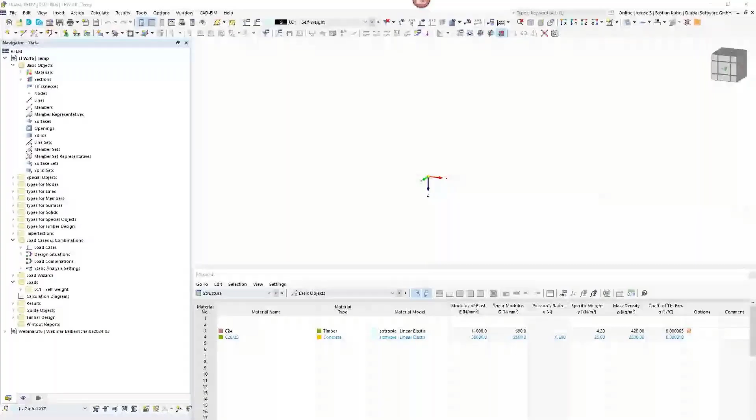Okay, I will share my screen for you. Just have to get the right one. This one's the right screen. Oh, I have to click share. Sorry. Yeah, looks quite good.

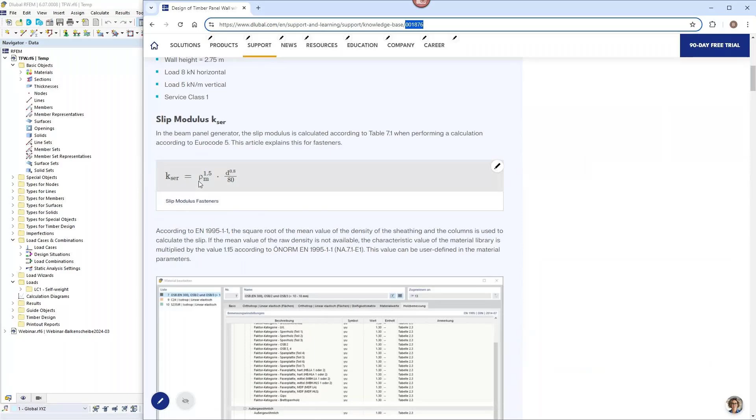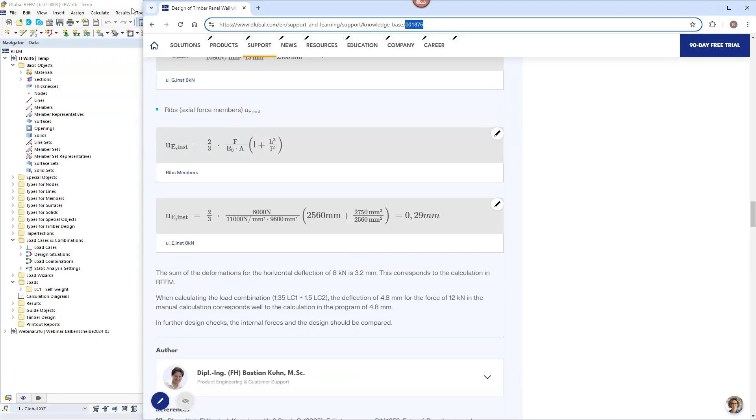Okay, before I start the modeling of this timber frame wall, just as an information for you, my colleague will probably share the link with you. The model I'm doing here has been analyzed and calculated also by hand in our knowledge base. You can find it by the number 001876. And here you can see the formulas that are lying behind it, and also the deformation. And of course, the inner forces are calculated here with hand formulas or equations. Maybe once I've generated the model, I will take a look back to the homepage just to show you what we are doing here.

Okay, before we create the model, we have to give a model name, timber frame wall. I will choose type of model 3D here. Then in RFEM 6, one of the advantages compared to RFEM 5 is that you have every design add-on completely integrated into the software, and it's not a separate add-on anymore. It's completely integrated into the software, which has a lot of advantages for speed and also design purposes. And so I can decide what I want to build or plan in here, and what we want to do in this first simple structure. I mentioned it already, we will create a beam panel.

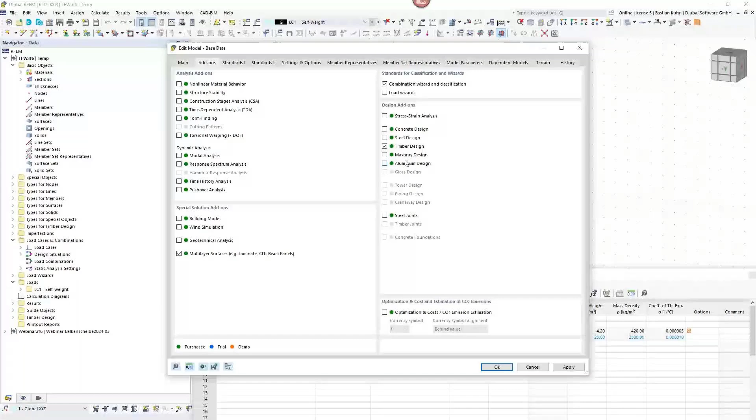Therefore, we would need the multi-layer surfaces add-on. We don't need the load wizard. We even don't really need the combination wizard, but it does not matter. And we will do the timber design in the timber design add-on. Looking at the third register in the basic data, we will have the standards here. We are calculating according to the timber Eurocode, and of course it is also possible to calculate according to the American standard, Canadian, and a whole bunch of others, even Chinese is possible for timber design.

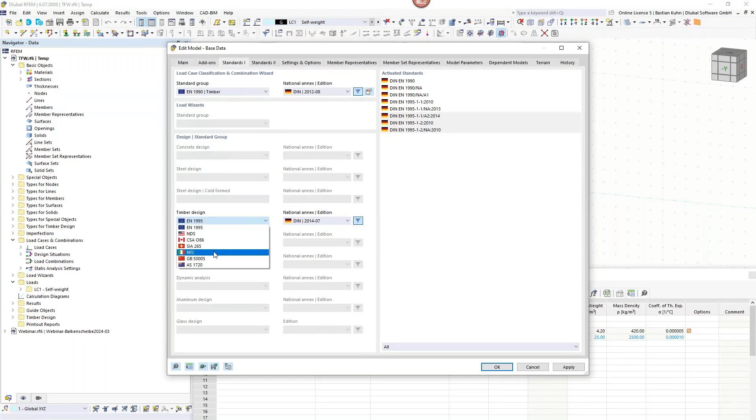We will choose timber design with all the national annexes that are available for Europe, and there it is quite similar. What is possible: America, Canada, Switzerland, Italy, because it has some special rules in Italy related to Eurocode, but different a little bit. There's Chinese and there are Australian standards as well. Okay, all the other options are not relevant for this quite simple model.

Okay, we start and we will create the surface or the wall, and therefore we create a new thickness. For starting, similar as, I don't know if you ever worked with our software, but also when you created a CLT wall or floor, cross-laminated timber, you can start with just a concrete material.

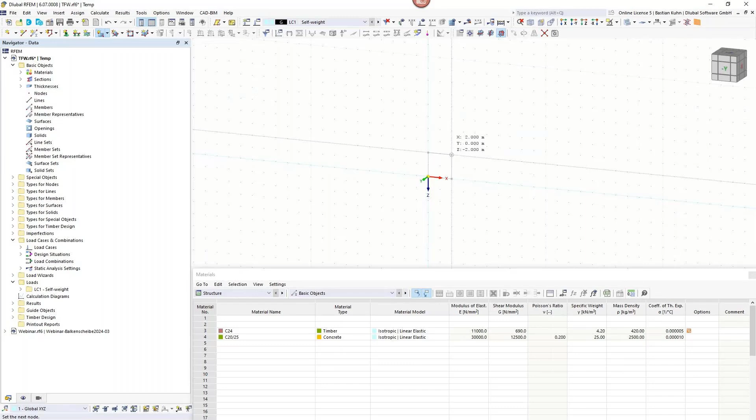That's what I'm doing here. Any kind of thickness, that does not really matter. Just create it for drawing the structure and how it's going to look. So it has a size in X direction of minus 2.56 meters. This is now a theoretical example, and I chose this distance of 2.56 meters.

I can maybe also add a little dimension line just so that you see it here, maybe in the other area here. Of course, for timber frame walls, you have a standard distance of each beam in the panel of 0.625 meters, so 62.5 centimeters, which is the standard design.

In America, with the inches, it's a little bit different, but once again, we're doing this here according to Eurocode. I will show how to change it also for the relevant parts of the American standard, but the main purpose here is Eurocode. And just to get back to the homepage again, here the hand calculations are also based on the Eurocode.

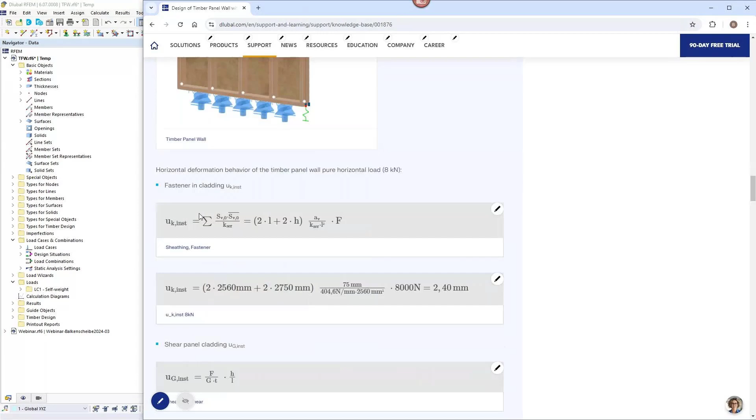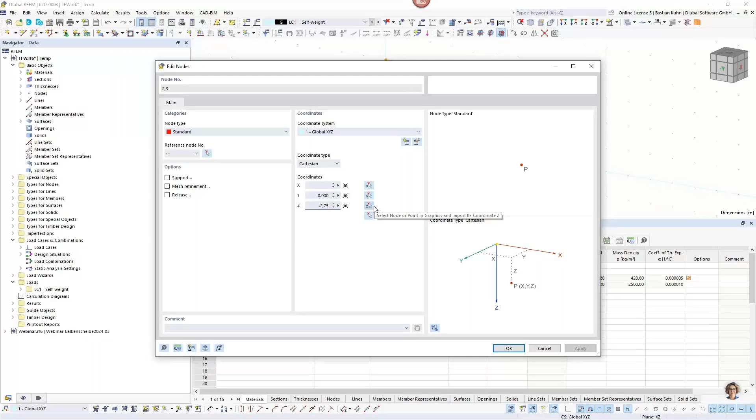Okay, and to see it in this picture, moving a little bit, because of the distance here I get exactly 5 beams side by side in this structure. Okay, just as an explanation if you ask why I chose such a distance here. For the height, I want a more European standard value of minus 2.75.

Then I will add supports, and the first support should be not movable in X, Y, and Z direction, and also no turning, because it's in this case a 2D position, and I will put that at the origin in order to keep it statically determined. I will also just move one support to the right side. In the bigger model that I'm going to do just after this simple model, of course, you would do a complete support underneath the wall. That's for sure. It's just for this first example here.

So this one is moving, okay, here, and so that it's not flipping outside of the plane in Y direction, I will define the translational degree of freedom in UY direction.

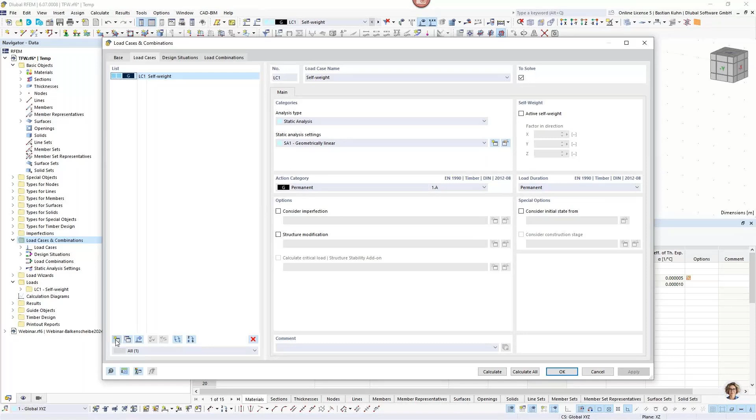Okay, I will put a line load for the first load case with a value of 5 kilonewtons per meter, and go to load cases and combinations and create a new load case for the wind. I deactivated the self weight so that it can be compared to the calculation by hand. And here's the wind, and I'm directly assigning a load combination in here manually.

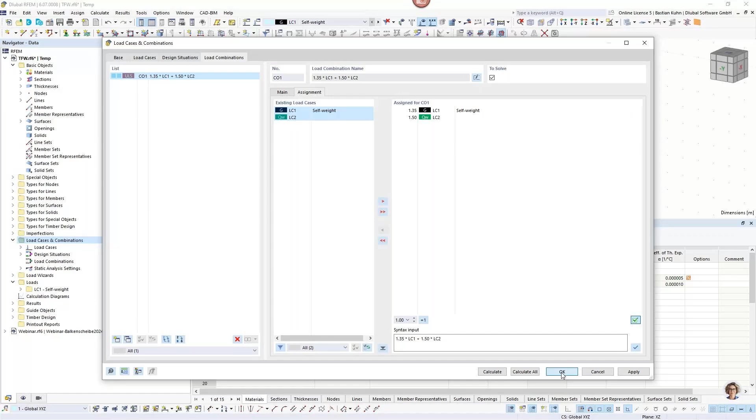That's what I mentioned at the start, that I don't even need the load combination wizard here, as I'm just typing it for this simple model. Once again, in the bigger example right after this, we have used the combination wizard. Okay, just typed, all right, and then it's there. So this is the combination that we are designing.

But of course, I forgot to define the horizontal load from the wind. This is going to be a force with a value of 8 kilonewtons, and it goes in x direction, minus of course, because I want it to be moving this way. Okay, but so far this is still a concrete wall, which we don't need. And how are we going to change it to a timber frame wall?

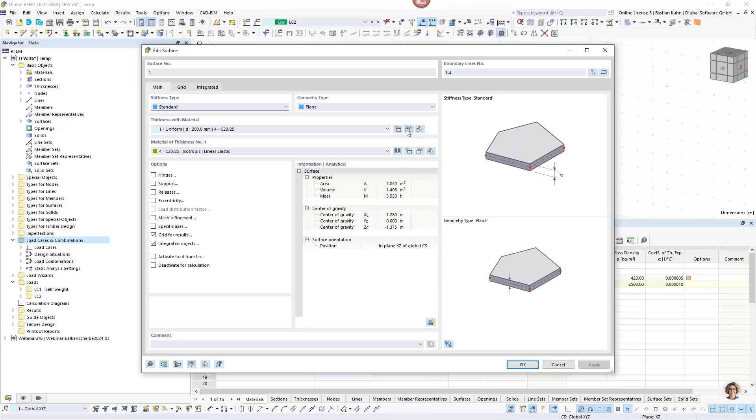We double click on the surface, and we'll edit or create a new thickness. In this case, I'm choosing edit this thickness. And now that I've activated the multi-layer add-on, I can choose the layers here. If I wanted it as a CLT wall, then I would have done it this way. But in this case, we want a shear panel. So that's the thickness type for timber frame walls. Not even pure timber frame walls.

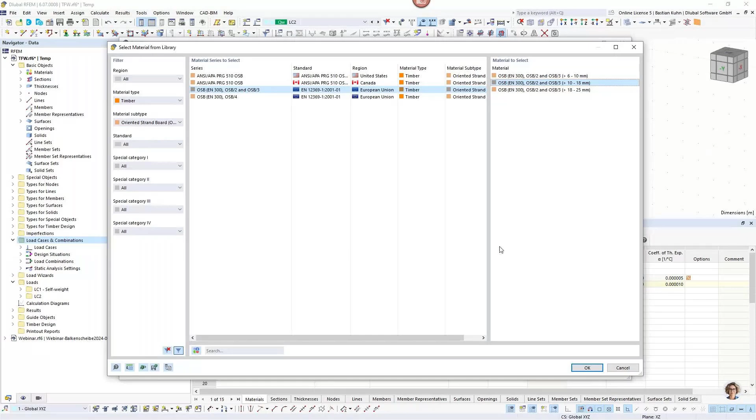You will realize it when I'm in the material database via this library book here. So now it's predefined OSB according to either American, Canadian, or European standard. For our example, we would use 10 to 18 millimeters OSB. But if you use the drop down button here, you can also use gypsum, for example.

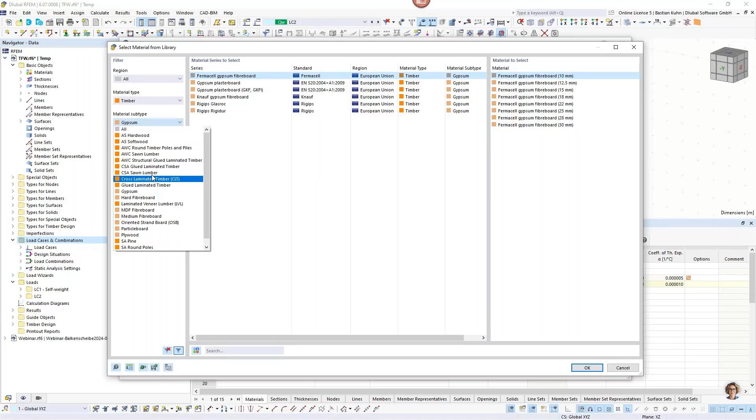Yeah, even for timber floors, at least here in Germany, what's used quite often are Fermacell gypsum fiberboards in order to stiffen your structure. So that's quite an economic way of creating your walls. So, yeah, I mentioned it here.

I would choose OSB. I can also show you just as an imagination how you would do it with the American standard. It works quite simple, similar to what you choose. I just have not switched my dimensions to inch. So for me, it's rather hard recalculating the 0.5 inch because thickness needs to be defined here additionally. So this is what we will probably better be choosing by the European standard.

We have to change the material into orthotropic for this type of thickness, and I will define 15 millimeter thickness in here. All right, so that's the sheeting. I also can make the planking from both sides. I can vary it, so it can also be unsymmetric. I can even say the sheeting on the other side is made from a different material than OSB.

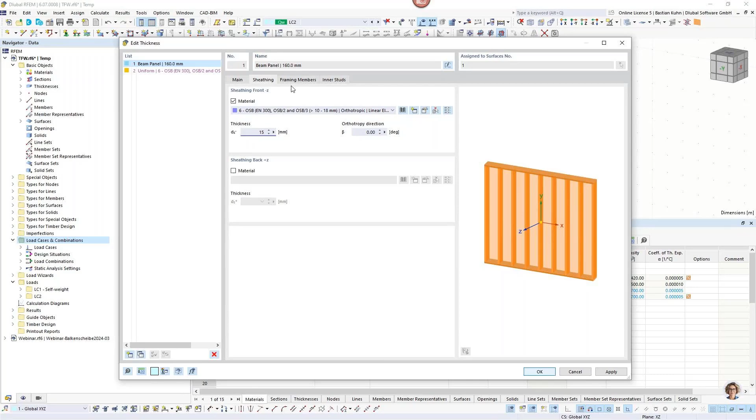For example, if you are using some insulation material, and this has also some capacities for stiffening out your structure. So this would also be possible to be defined. So the material can be different on front and back of your beam panel. Okay, so this leads us to the framing members. Here that's the usual material section database that you can choose.

Sensible, of course, is here only the rectangular one, but just as a notice, it is possible to choose and define any kind of section here. It's just for this case, I'm using a 6 centimeter by 16 centimeter board or beam inside, and this is the most standard way to do it, and that's what I'm going to do for this example. These special selections I will show in the bigger 3D model afterwards.

Then you choose the connection type. You can have nails, staples, or user-defined slip in here. And when we choose staples, for example, with the dimensions of 1.5 by 50 millimeters, you see that the stiffness is already calculated in here. We're choosing a spacing of 75 millimeters.

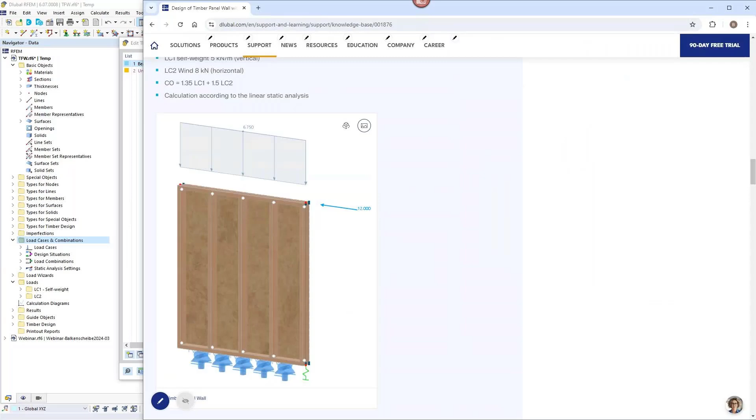And when we compare it, I hope it's the last time I'm switching to the homepage. If you look into this here, you see how these values are calculated in here. So with the slip modulus from the mean value of the beams and the planking. Okay, so this gives this value.

It would also be possible to consider the connector stiffness just in one direction. So then you have it just in X direction and the Y direction will be 0. I will also show what that means in the generated beam panel. So that's an important info that you should remember once we generated the beam panel. So the point what I'm showing you here is this is a generator to generate the timber frame wall in the big program RFEM.

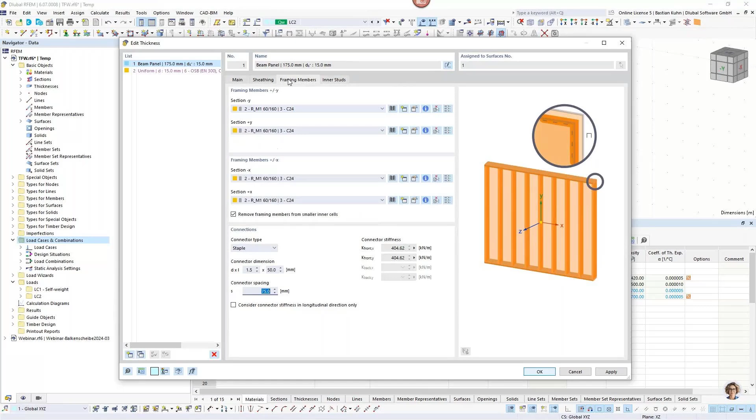Okay, then we have the inner studs in here. You can have other sections in here. That's similar to what I showed you when I was working in the framing members. It counts here vice versa. You can have here IPE profiles if you want. For example, if you have a very high vertical load and you say, okay, in one special part of it, I want an IPE, then you can create any distance in here, 1000 millimeters, for example, and create an IPE. So that would be possible to also be defined.

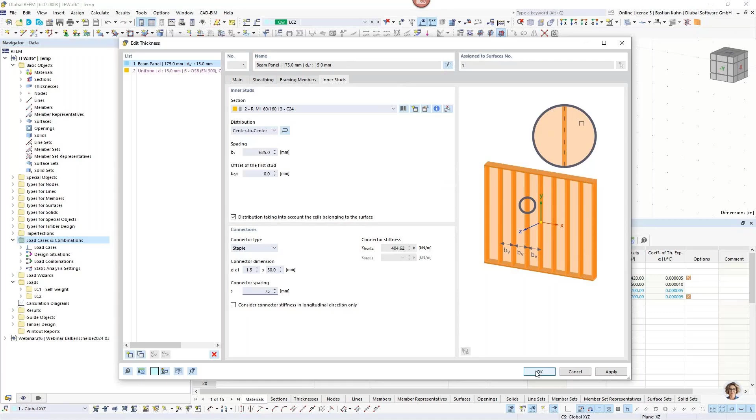All right. But here, for this example, we are choosing center to center and the spacing that I already mentioned, 625. This offset and what it makes, I will also show in the bigger model afterwards. Okay, but what I'm choosing similar to the definition before is 1.5 and 50 in here and the connector spacing of 75 millimeters. So then I press OK. And one more time, OK.

So nothing's changed. Surprise. Why is nothing changing so far? The answer is because I have not shown the beam panel. Our idea for developing the beam panel is that you work, as you know it, with surfaces. And then inside it, you generate the beam panel.

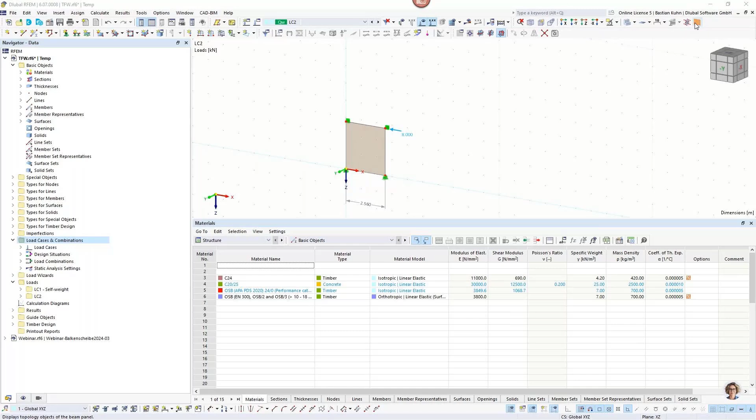And when you now activate the beam panel, you can see that it's generated in here. So here is the top beam and the bottom beam, and also the posts. So we have 5 posts in here, obvious because of our distance. I maybe can switch on photorealistic visibility a little bit just to give you a better imagination of what it's doing.

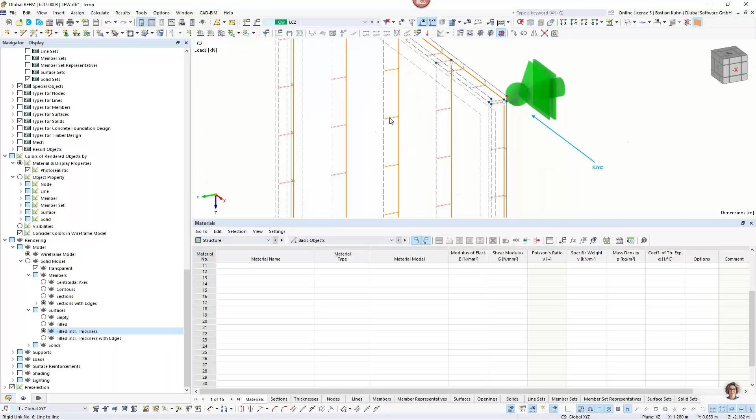I hope that can be seen this way. So you see the OSB is eccentric, moved to the outside. It is connected with these little, now I'm switching the rendering off. It is connected with these little pins in here, which are representing the staples that we have in there. And when we double click on one of those pins, you can see that there's a rigid link defined and it contains the stiffness that we generated in the beam panel.

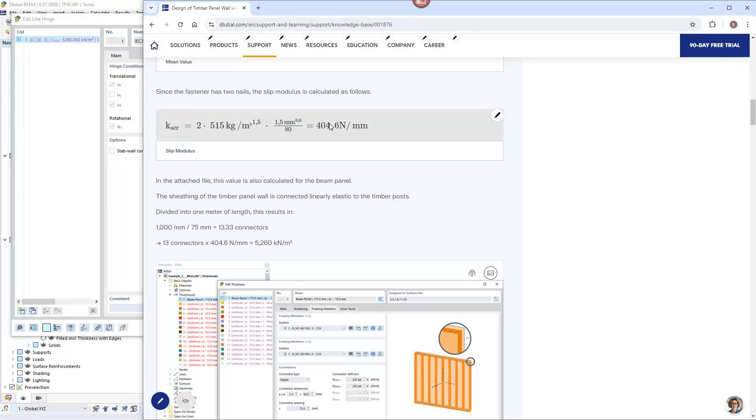I promise not to show the homepage anymore, but I do it just one more time because it's just good to have it seen in here. If you remember, I had defined a spacing of 75 millimeters, and this is calculated on 1 meter, which gives you 13 connectors. 13 connectors times the calculated slip modulus gives us this value in here. So, and this is done here. And I also told you that we should remember this longitudinal stiffness, where if I had chosen just to have the stiffness in UX direction, my UZ value would be 0 in here. So that would also be possible.

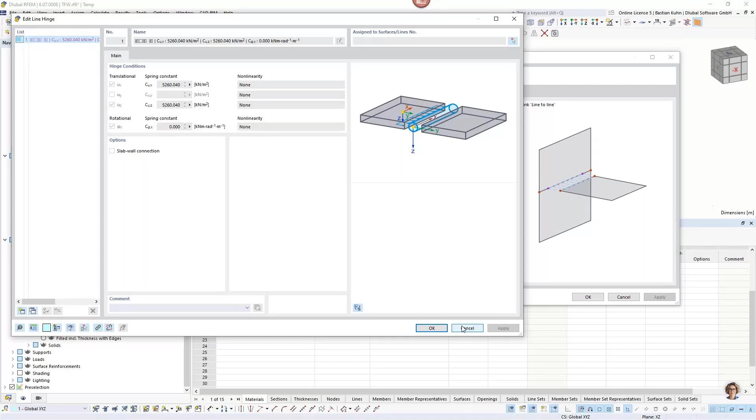Okay, this is the generated hinge there, and it's generated once again between each beam and the OSB planking. I will put on the rendering again. Oops. So here this way, it's probably a better visibility. Okay. So now we want to see results of it, of course.

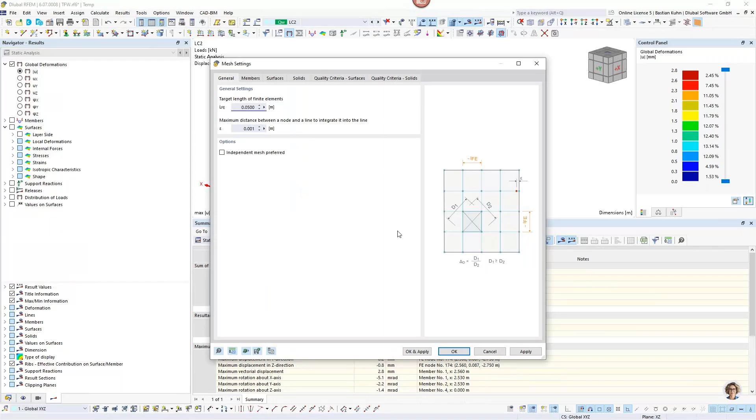I did not mention the FE mesh. That is something that we should have maybe looked at before, but we can calculate it once again. I will get the rendering off, and you see that the FE mesh in this case is nonsense. So we have to go back to the FE mesh, make it a little bit finer with 5 centimeters, which is maybe too fine, but for this example, I think we can do it just to compare our deformations and inner forces. And maybe also the reaction forces, because actio should be reactio. That's what I learned in my studies. All right.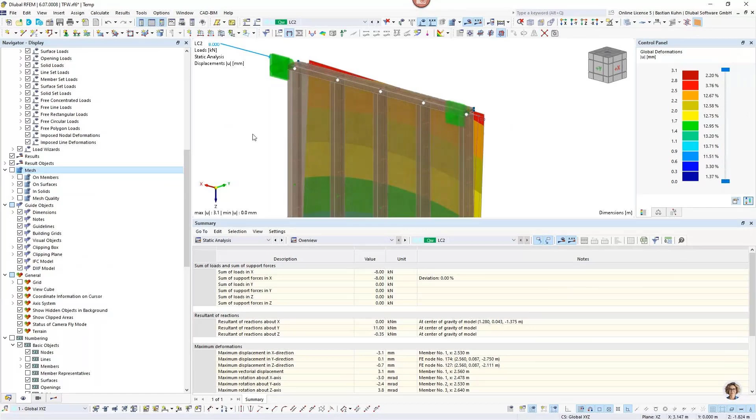So you see that the FE mesh is now fine. Maybe too fine, but it's good. We will leave it this way. And we have a deformation of 3.1 millimeter, and reaction forces, actio, reactio, that works. We have, because of the eccentricity, small forces here, but I think they can be ignored in this case, which gives us a little bit changing inner forces, but not that much. This is the deformation that you would also calculate by hand with this simple formula. And now it's actually done. You have the stiffness correctly assigned, so that's all working.

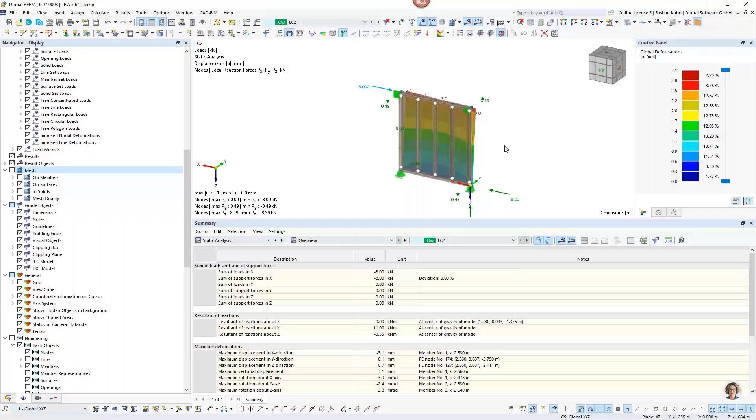Of course, we did not design the timber frame wall. So how would you design the timber frame wall? This I can also show you via our new, well, it's not new, but in RFEM 6 it's new, the so-called member representative. So if I'm choosing here member representative for the posts, and what do you verify for the post? The buckling, of course. And the advantage of the member representative, in case you have not worked with this in RFEM 6, is in former times you would have to choose all the posts and edit them and work on them. And this is now not necessary, because every member that is similar to the other one, which is the case for posts in timber frame walls, is summarized in the member representative. So you just do it once, and in former times you did it several times. This is one of the good advantages.

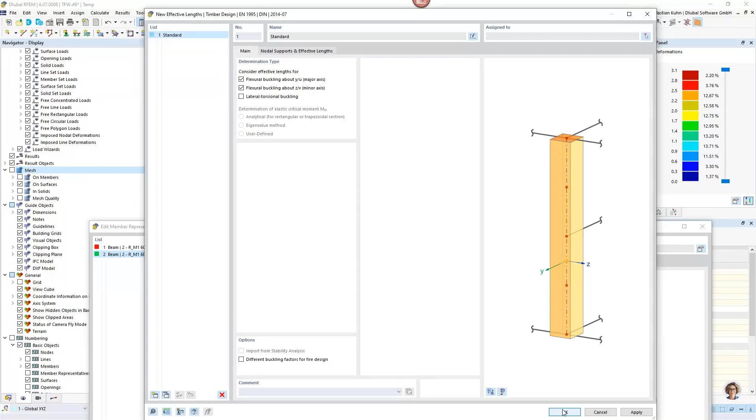And then, of course, effective lengths, where we do not verify lateral torsional buckling. We even do not need to verify the buckling about the minor axis, because that is covered by the planking or by the sheeting. But just for the sake of completeness, we are verifying it. Then we switch to the add-on timber design, which is right here in the drop-down menu. Once again, one of the new advantages of RFEM 6 is that you do not have these add-ons here on the left side anymore. I mean, you have here the register timber design, but it's completely integrated into RFEM 6. Okay, what do we verify?

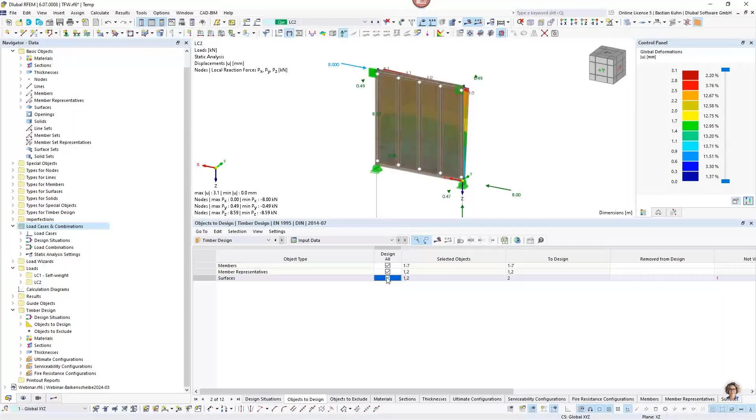We want to verify this member representative that I just showed you. So that's member representative 2. And then we calculate it and look for the results. As I said, what we want to verify here is buckling. Pressure against lateral to the grain for the downstand beam is also possible, but it requires the definition of an additional beam. That's why I'm skipping this here, just as information in case you ask yourself this question right now.

Okay, you see stability even works in both directions, and to show you also that the verifications are done, and we are very proud of how these verifications are shown now. Here you see that all the equations are there with nicely written formulas, and of course you get the slenderness ratio and the buckling factors, and this can directly be put into the printout report and is your documentation of the results of what you have calculated here for the posts.

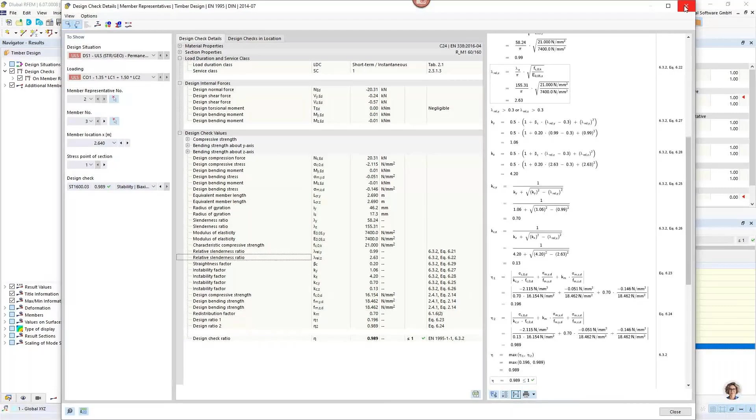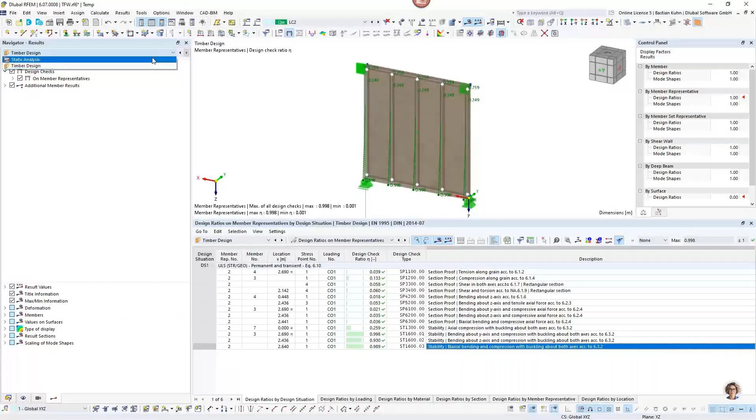Okay, the connections inside are also the most important verification. It must be done by hand, but there are methods and ways that help you calculate that. You can take a look into Navigator, results, static analysis, releases, and then line hinges and forces. So usually the value that you need, we'll switch off this one and also the rendering once again.

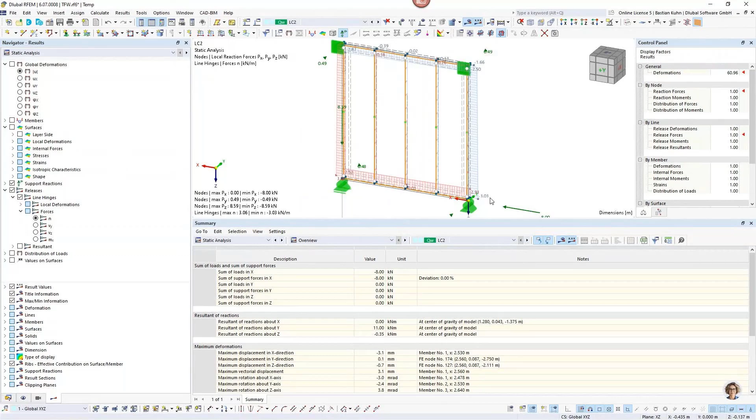So you see here, in the middle nearly nothing is happening, and it's rather a constant value. So when you are very much on the safe side, you would calculate your load bearing capacity of your staples in this case, and compare it with a value of 3 kilonewton per meter, or you could also take the middle value. This is what the software gives you, and we're also working on designing them. Of course, this will also be possible quite soon.

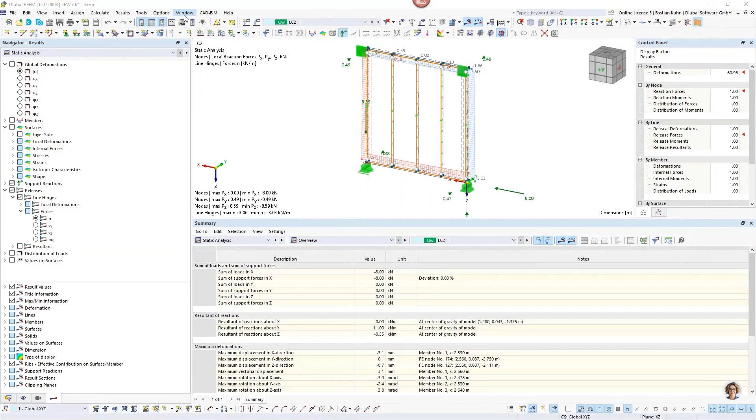Okay, this is the simple model. In case there are no questions unanswered, there is a question: what about the possibility to add openings? Yes, that's what I'm showing you now in the bigger model. So that's a good question and leads us to the bigger model. Therefore, I'm closing this and switching to the bigger model.

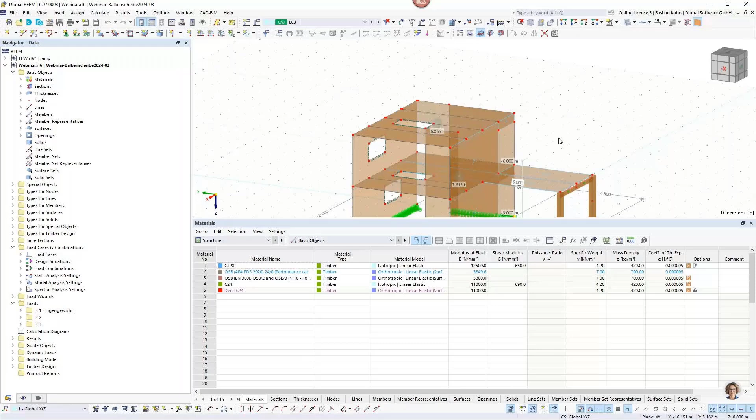It is a house that I have probably been showing here for 10 years or something like that. So if you take a look at the historic structures, this is something I probably showed 10, 15 times here already. It is completely made from CLT. Here it has a little balcony. It has a length of 8 meters, width of 10.8 if you include the balcony outside.

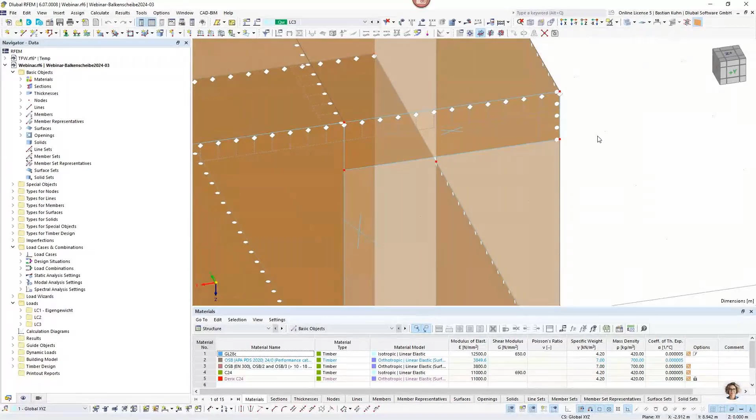All the CLT plates are connected with hinges here, and also here on the wall they are also connected. Not the surface, I wanted to take a look at the line hinge. Here's one. Okay, so there should actually also be a slip in X direction, and it's similar to what I showed you in the smaller model before. Then you get the forces in the line hinge and have to compare them with the load bearing capacity.

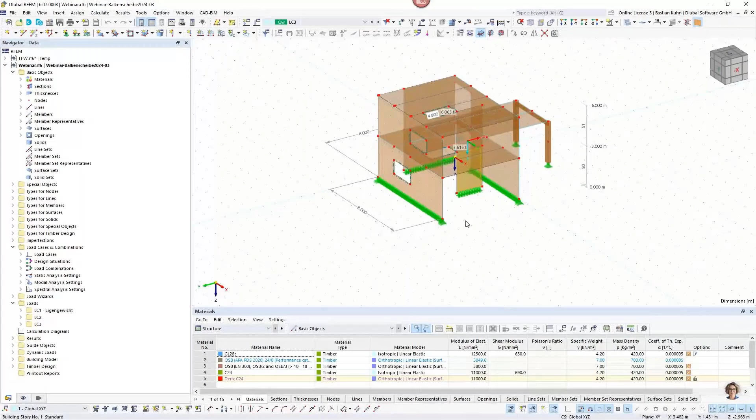Okay, so now this CLT building has openings here, of course, and I want to change maybe this wall and also these inner walls into a timber frame wall. Before I do this, what you would have to do in order to regard the opening is to separate this surface into several surface cells. And for this, we have a new function here. It's called extend trim line to next member line.

So we say okay, and then you see that it's divided here, and I now have these surface cells. Surface cells are quite a new object in our software, which are useful on a whole bunch of elements in the software. And we are now also using it for the beam panel.

You probably know that, at least when working according to Eurocode, for the timber frame walls there is a simplified approach according to chapter 9.2.4.2 or something like that. I'm not 100% sure which chapter it is, but it's 9.2.4 something. And this is for a hand calculation.

And what would you do when you calculate such a structure by hand? You would calculate your horizontal force, and then you would say, okay, this surface cell will bear this horizontal force, and this surface cell will bear this, and I need anchors here and here at this point, and I'm totally skipping the elements in here.

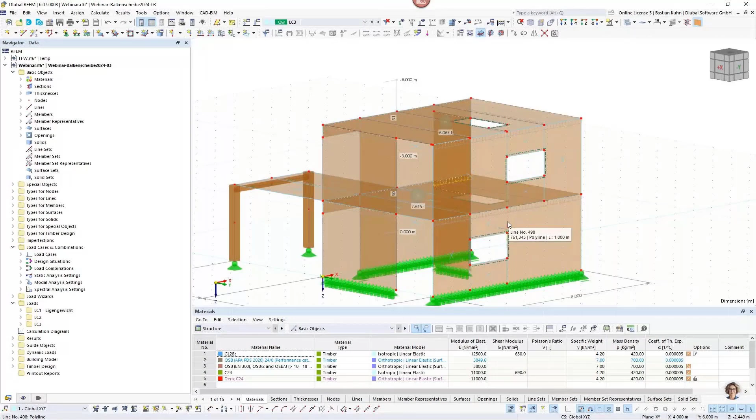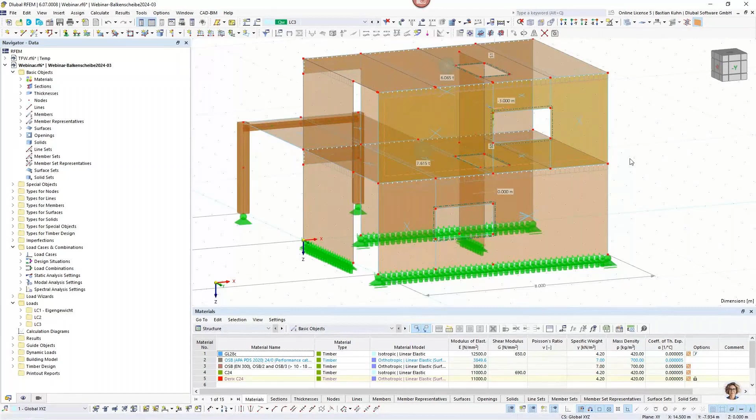Maybe I would delete this one and divide the bottom surface at one point, just to show what you can do regarding slip and what you cannot do, and where the difference is compared to the top, where I still have one continuous surface. So I right click and say divide surface with intersecting lines, and now it's divided. I'm just doing it on one side for demonstration purposes.

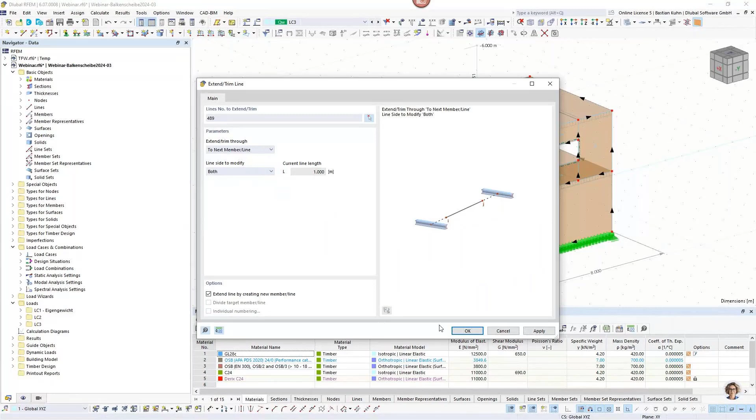So extend via copying, leaving the cells here. I'm quite curious what's coming out of this, because I've never tested it before.

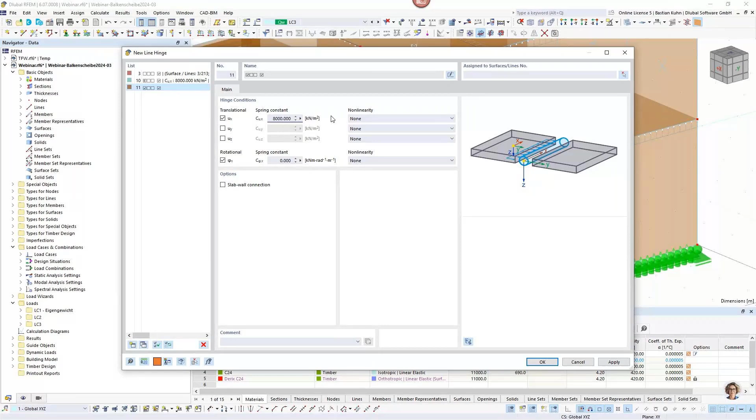I will insert an object line hinge dialog box, giving it my favorite slip of 8,000 kilonewton per square meter. Here and here... and here I'm having the slip. That's quite similar to what I've done on the walls, on the CLT walls.

Sorry, I forgot to mention the load. We have self weight here, quite simple, 1 kilonewton per square meter over the complete balcony. In load case 2, I have 1.5 kilonewton per square meter.

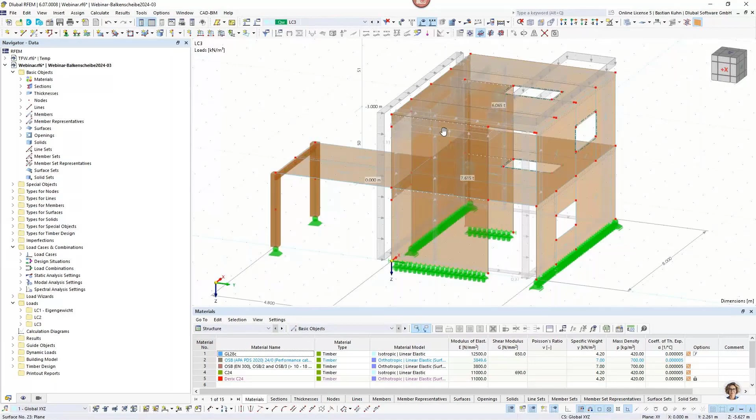In load case 3, I've generated the wind load blowing on the building from the front, which is stiffening out the structure. Of course, I choose an automatic load combination and generate all the load combinations we're using here. Okay, so a lot of words I said.

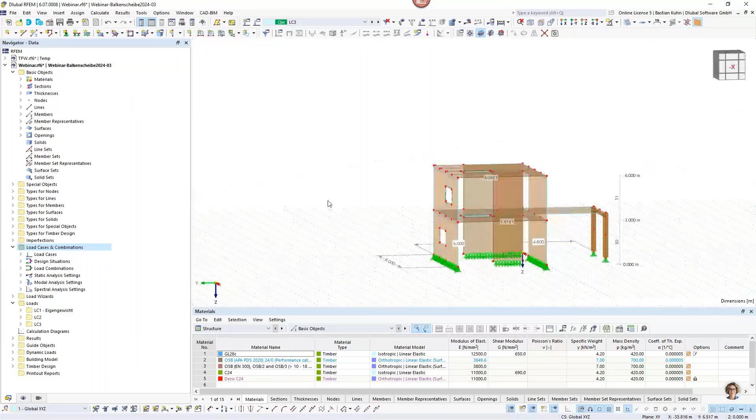Now I can go and display our relevant walls, these ones, and go into the selection, define edit surface, and choose the beam panel we just defined.

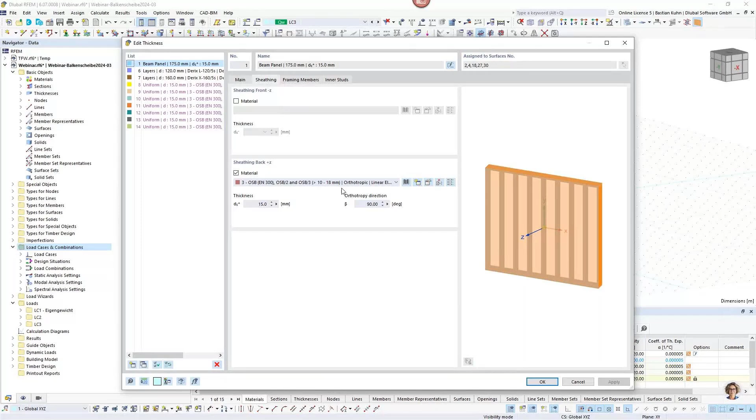I will go to the dialog box. Just once again, I've changed the sheathing on the other side, but it's quite similar to what we've done before. Framing members are the same, and... oops, sorry.

We're using staples, and I'm keeping the removing framing members option, and also the distribution, and this offset here is 0. So then I generate it and press OK.

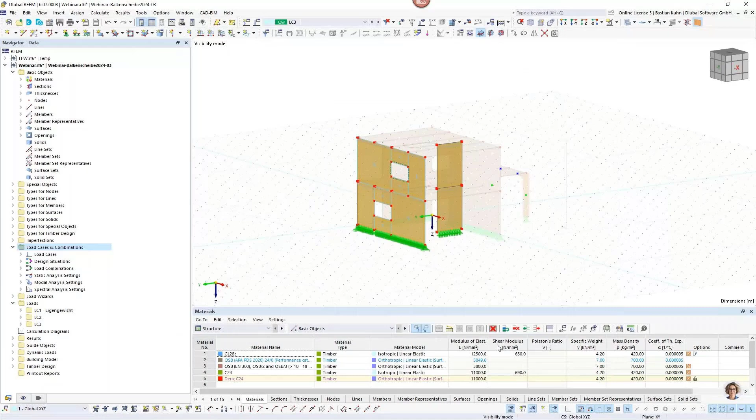Then you see that this one is generated here. This one's not there - there was a small problem. Yeah, I should have... sorry, no, it's not working because I have not divided it.

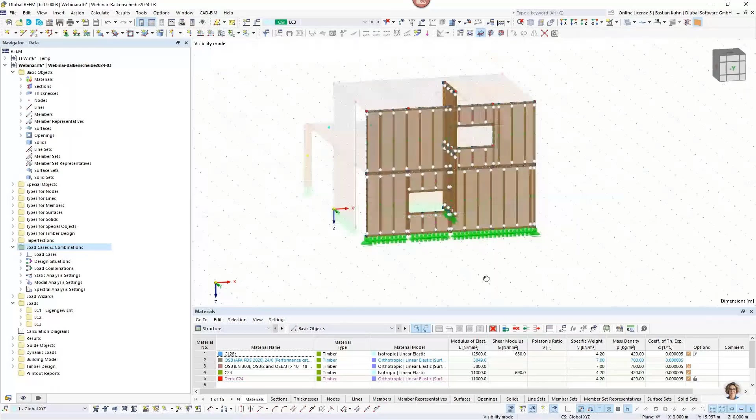I said I would be curious what's happening, because I never tried it. I probably should have tried it first, then this would not have happened. But anyway, okay, so now we look at the top floor, the top wall first.

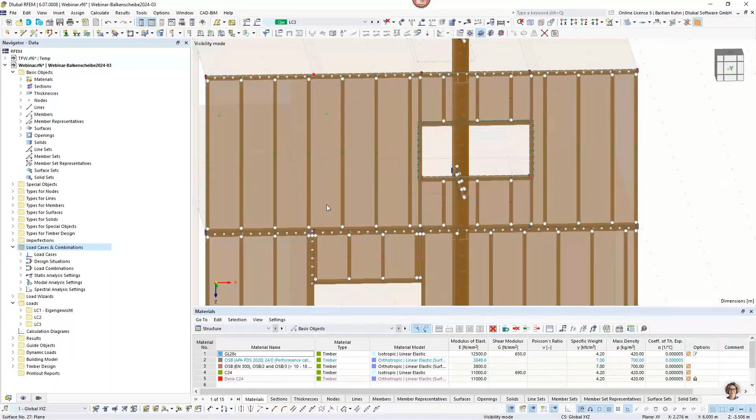We see that now the distribution of the beams of the post is quite good. We would calculate the opening, and it kept our spacings of 625 millimeters in between. Here we have a middle value of 100 millimeter left, and this is also good because we can still get insulation into it.

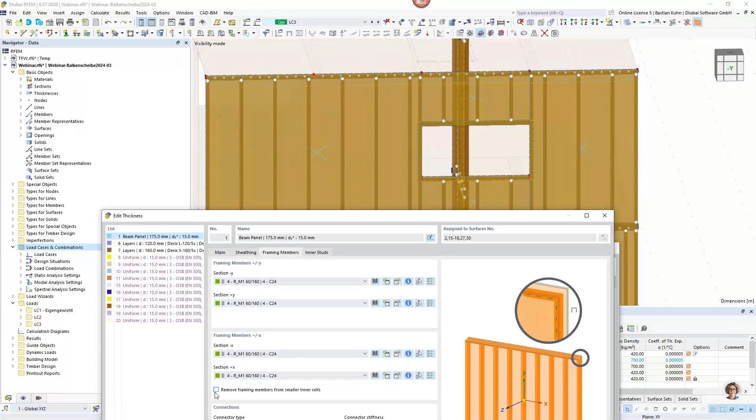But yeah, what I wanted to show you is what this special selection does here. So if you remember, this post is coming down here, and if you do not use the remove framing members from smaller inner cells option, choosing apply, you see there's now an additional post which makes no sense. So this is actually what this selection does here.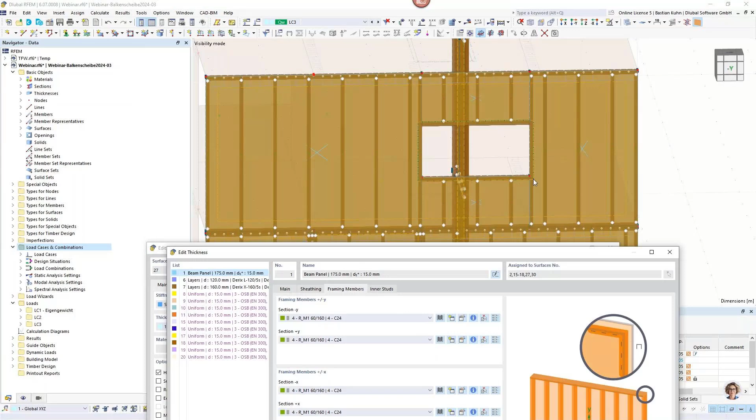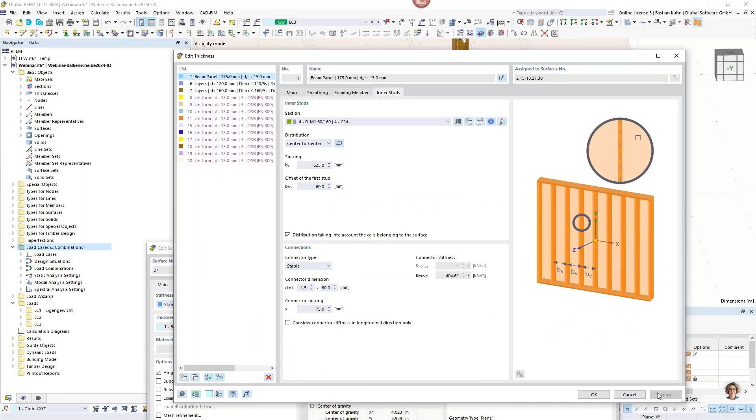In case it does not fit, or you want a bigger distance beside this, you can have an offset for the first stud. Once again, here I don't think it makes sense, but if you want, you can choose it, and then you are moving the first stud by 6 centimeters.

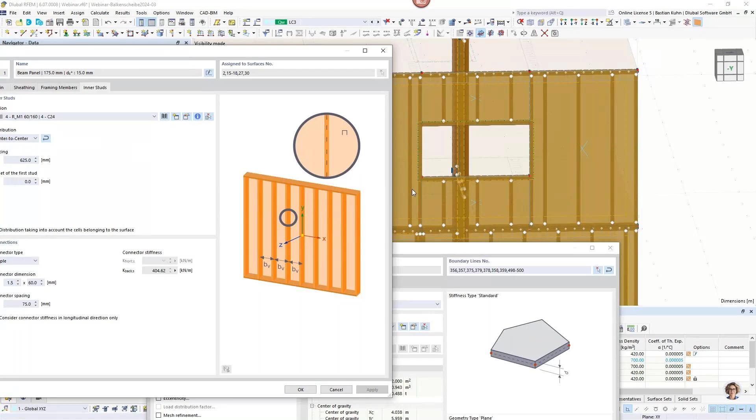Maybe I will do it like this, it can probably be seen. So this, and we go apply. So you see here I have now 6 centimeters less, and then I can put more insulation. This is how this works and how you can assign that.

Now, when we talk about openings, the point is, it's in Europe - I don't know how it is all over the world, but in Europe we have special rules about what you can do on such bigger openings. Maybe you also have a complete door going to the bottom, or a balcony on this side - you can imagine 100 variations of it.

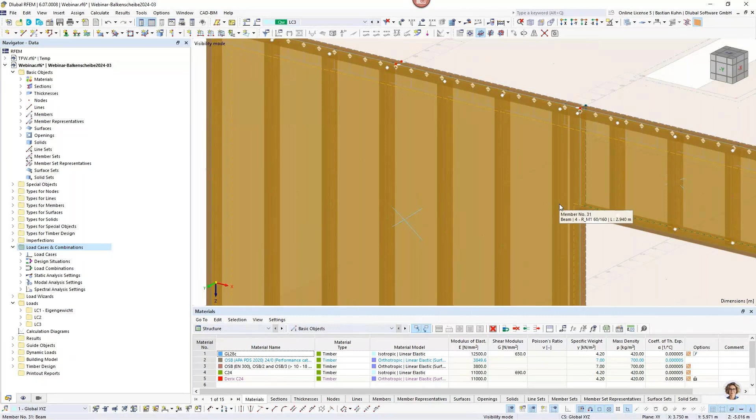What we do here in Europe is use the top beam on this window and move it to the next stud. That's one of the possible constructions, and then it's completely shear stiff, and it's nailed on every part wherever our OSB plates are connected or coming together, and there's always a beam or a post behind it where it can be nailed on.

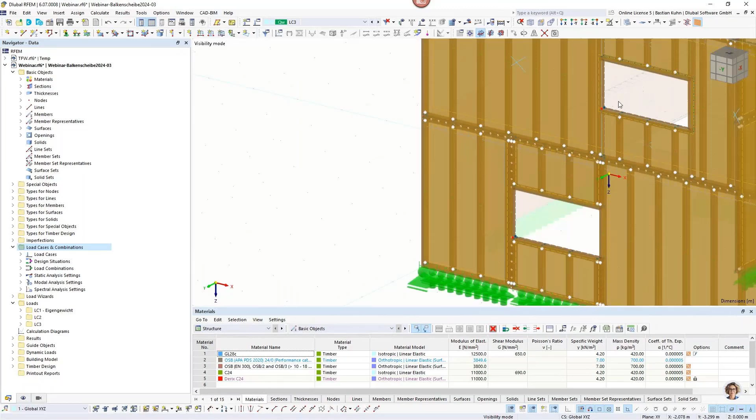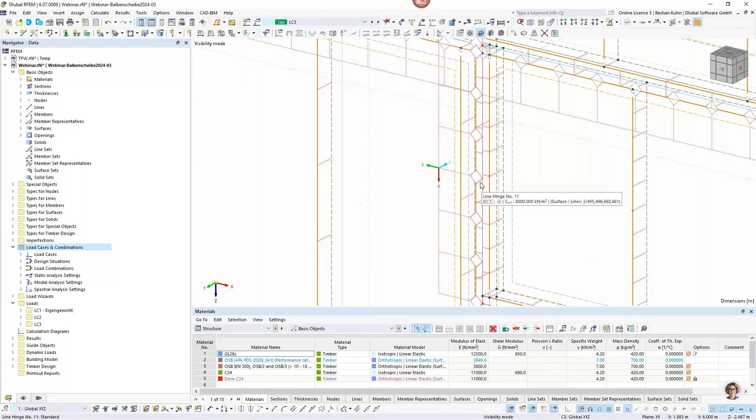That's for sure, or what I did here at the bottom, which I mentioned from the start - if you want, you can connect the beams and have a slip in between. So the slip is what I showed you in the first example, between the OSB and the post, and between those two timber frame walls. That's the way it can be connected.

It's maybe a little hard to explain, but after the webinar, download the model and take a look at it, then it should be quite easy to understand. Why is it not calculating? Just hold on, we necessarily don't need...

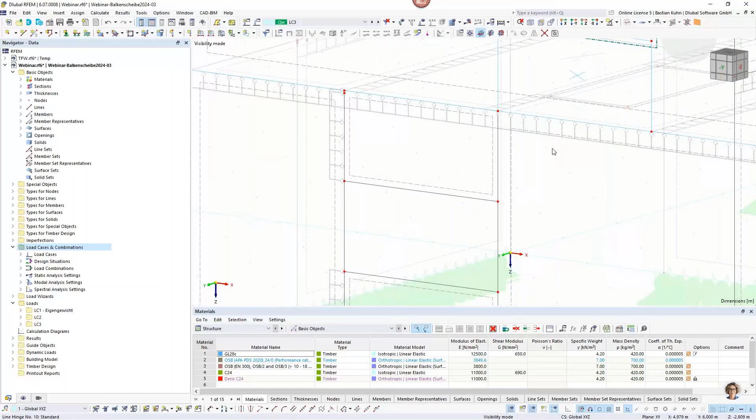That's strange. Okay wait, maybe I will not get it going. Hold on, we will get rid of this. Maybe we will not divide it. Go in here, because maybe this was the reason for it.

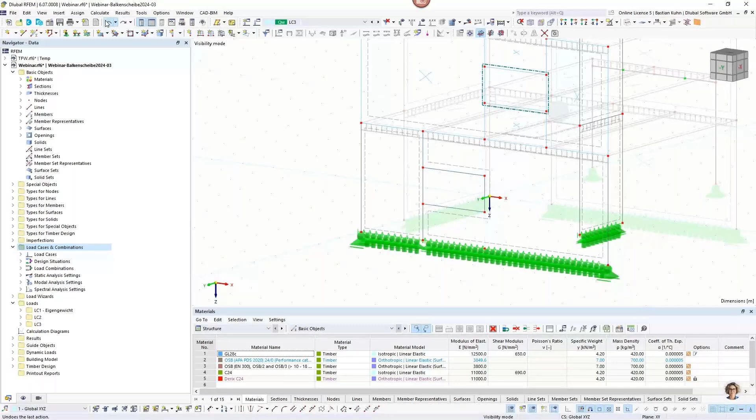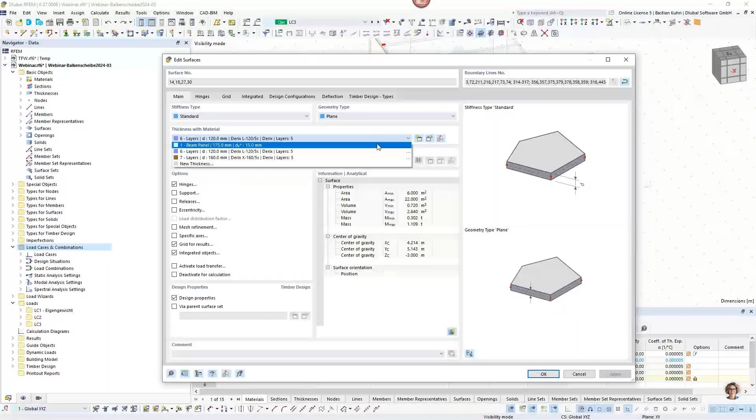Okay, yes, I know it's still intersecting. So in here, and now if we do it again - oops, too quick, sorry. Up and here, edit, and choose again the beam panel.

Why is that now? So I forgot this one. Okay, so we need to extend here, one more try, and otherwise I will leave you without the results of it. But I think it can work. Yeah, should be.

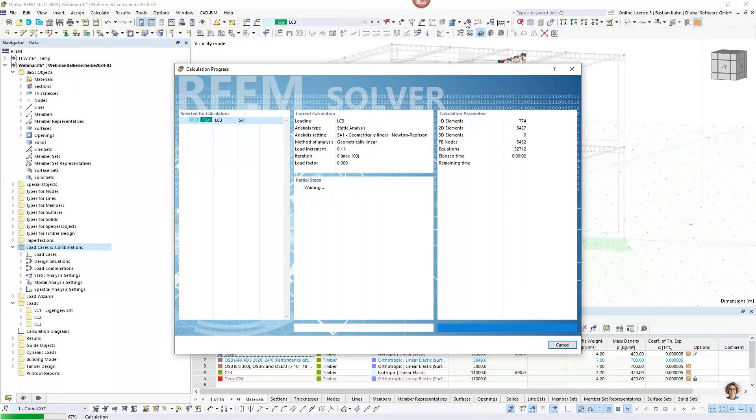Okay, it's not a real small structure, not even a big structure, but yeah, I also use the building model inside just to get my masses all around. So masses maybe also a good point.

One other advantage of using such a 3D object is that you can use the stiffness of the timber frame wall similar to CLT for every calculation. So also for your dynamic analysis, you can create response spectra and use it for this.

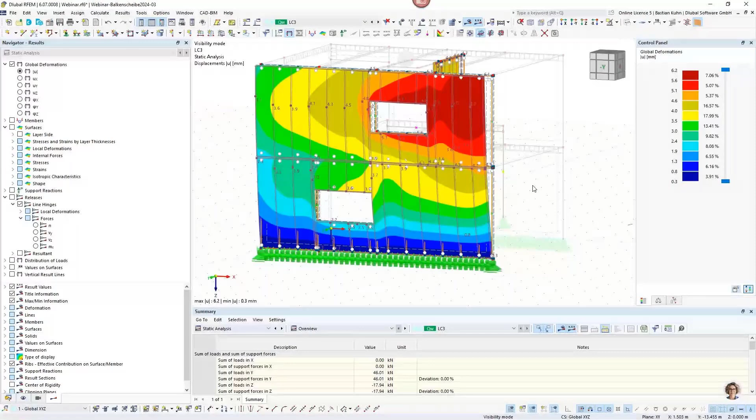And you see in here, this is now quite similar to what we have before. We have the deformation, we have the inner forces of the beams, and can do the verification, of course, on it.

Okay, that's it, that's all I wanted to show you. Quite a short webinar, I think, but 43 minutes was not that short. I hope my colleague was able to answer all your questions. I'm not so sure - maybe Andreas, do you have something open I should mention? No, I answered quite all the questions.